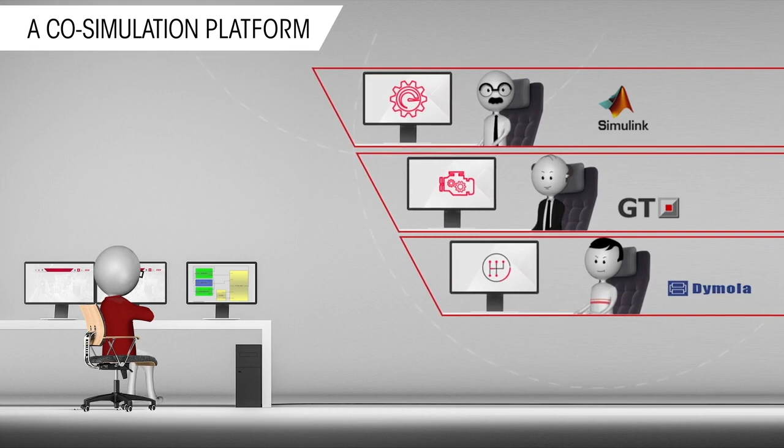Today, Jim is sad. Jim is a bright engineer at FEV. He's in charge of building the new powertrain for new vehicles, meeting the new RDE legislation and a multitude of new worldwide pollutant emission regulations. And nothing works. He has one team to define the ECU control laws, one for adapting the engine and its after-treatment system, one for the gearbox, and of course all these need to work correctly with different types of vehicles. All the design teams come with their models made from different software tools and are absolutely unable to communicate.

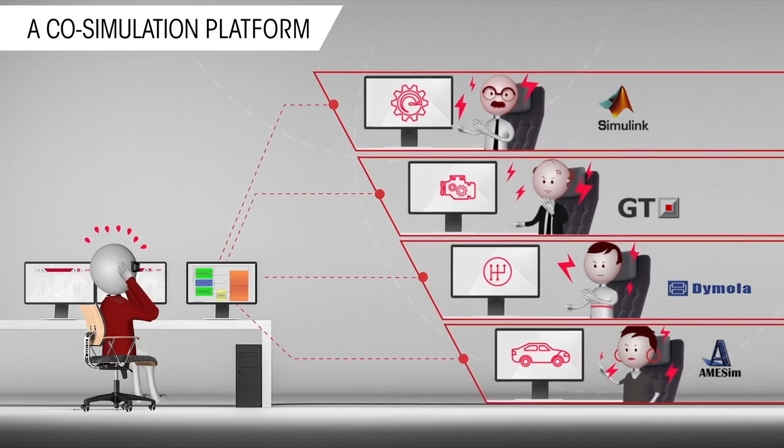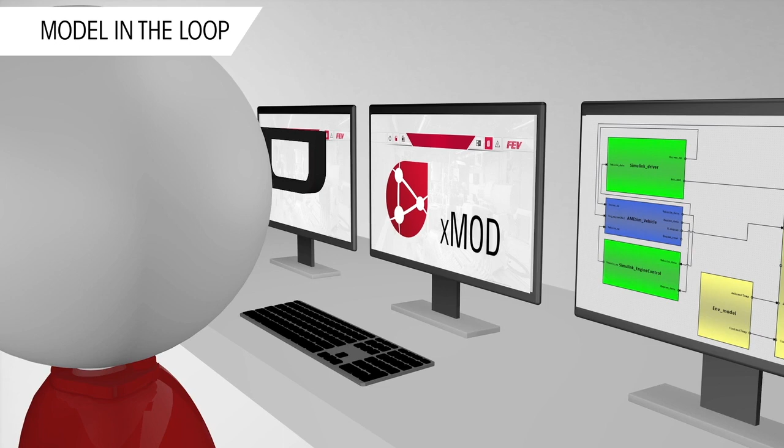Fortunately, at FEV, they have xMOD. xMOD is a co-simulation and virtual experimentation platform. Combine your models and create the complete powertrain system using native co-simulation features and standards such as functional mock-up interface. Thanks to the power of calculation of xMOD, there is almost no limit. Now the design teams are happy, and Jim too.

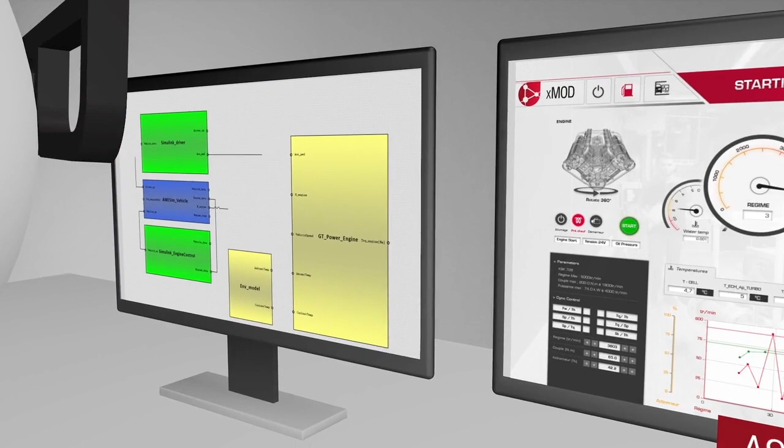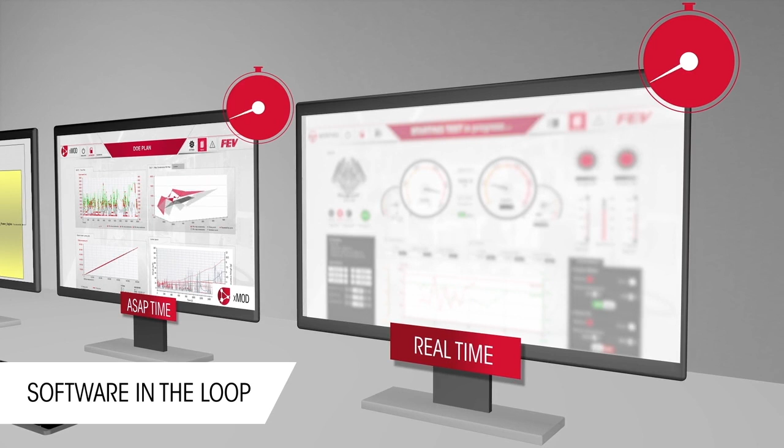The models-in-the-loop operation is done. He can go to the next software-in-the-loop step by integrating the models in standalone and check if the design operation has been done well. In a minimum time, he will be able to assess an incredible number of scenarios, due to xMOD's exceptional speed-up, 10 to 40 times faster than others, and much faster than real time.

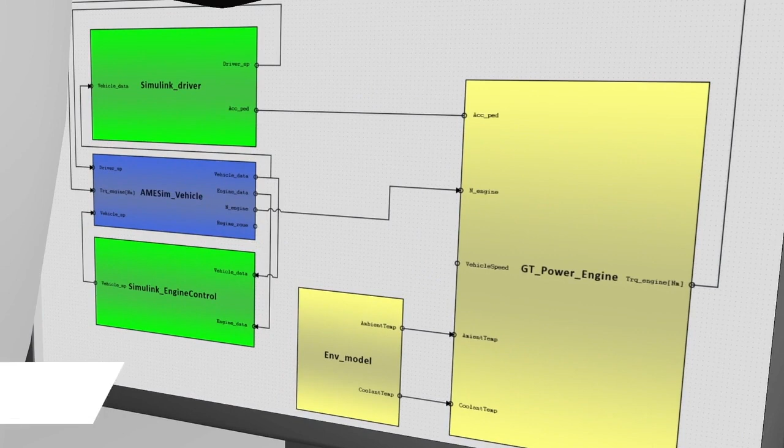Hey guys, it seems that there is a problem somewhere in our simulation. What to do? Let's go back to my models, the so-called MIL step, and just modify my models accordingly. Replace my engine model. Wait a minute or two. And now it works, just like that.

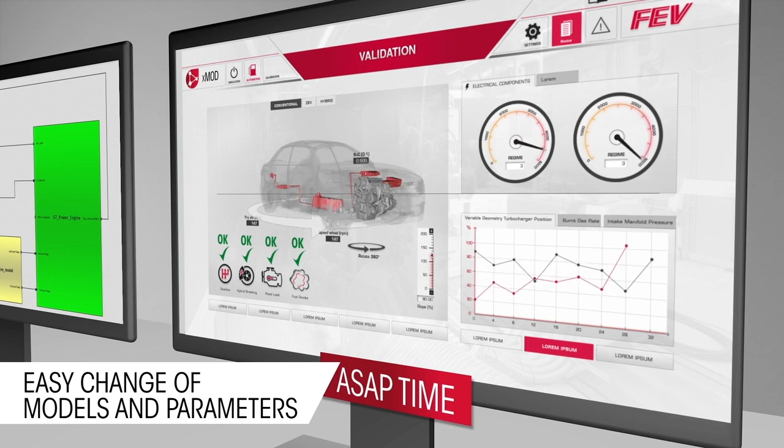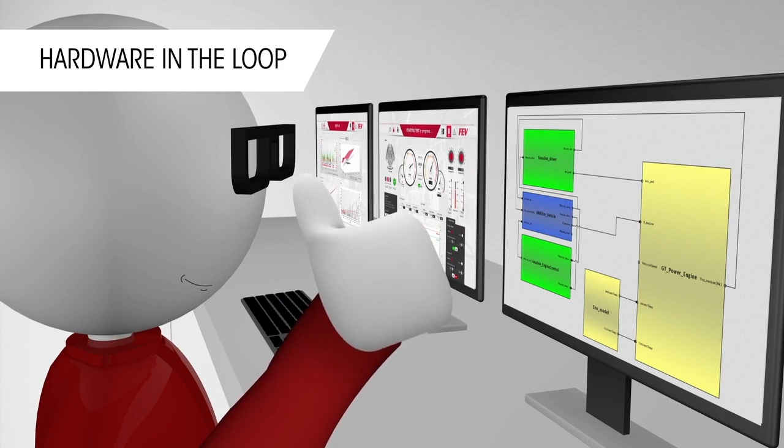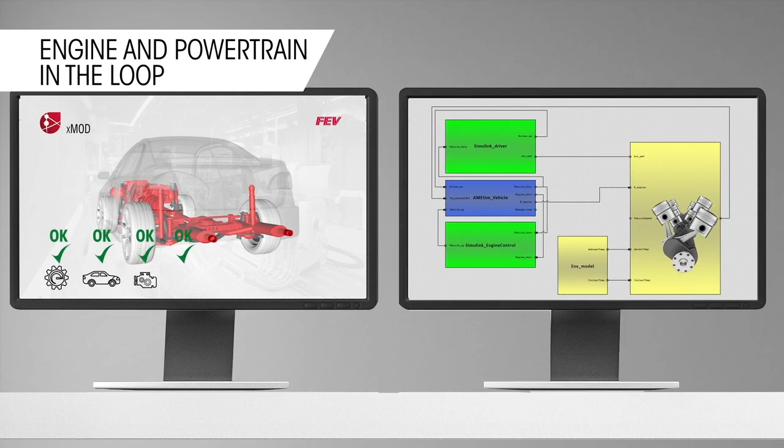Now Jim is eager to check if his design proposition will work in the real world. First step, test the ECU in the FEV HIL testbed in real time, and then check at the powertrain test bed. Imagine the time that Jim has saved. Without xMOD and simulation, it would be very difficult now to develop new powertrains, including hybrid and electric ones. What makes xMOD different is its heterogeneity and its hard real-time capabilities. Thanks to that, the models keep the same level of accuracy along the process.

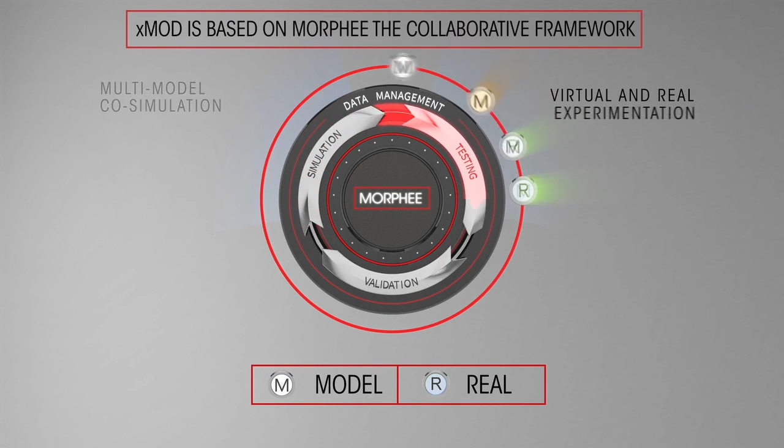Consider all the functionalities and tasks you can do with xMOD. Imagine the gain of time for everybody at each step, from the design office to the control team, and then to the testing and calibration department. You can stay in the same environment, same models, screens, procedures, test cycles. Now Jim feels relaxed. His team is happy. His customer will be happy, and maybe will buy an xMOD for his own.

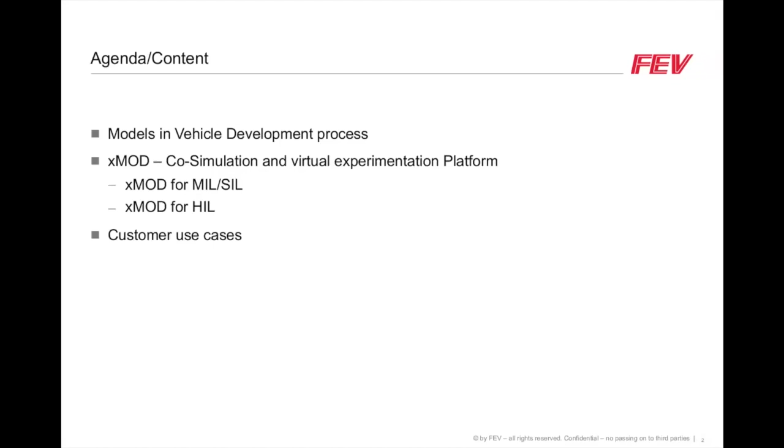I will finish by presenting some customer use cases that show a panel of cases that can be applied using the xMOD software. So let's start with this first slide, explaining the current process.

I think you all know how this process is organized, mainly in three big steps. We start from requirements until producing the final product. From the requirement, we start mainly by doing modeling and simulation. We have different departments working on different parts of the vehicle, each using the best-in-class software on the market, with many highly skilled engineers using their best software. So they have different types of formats.

This is the first step, which is virtual integration. They will try to do some co-simulation, some integration of the systems together to understand the system. As systems become more and more complex, especially the vehicle, especially with hybrid technology and ADAS technology, it becomes more and more important to study the system early, to do full integration early. So this is the first step.

The second step is more related to the mixed integration between the virtual world and the real world. Here I am talking more about real application, in which we have models running in real time and connected to hardware systems to do some validation, for example rapid prototyping or function testing, etc.

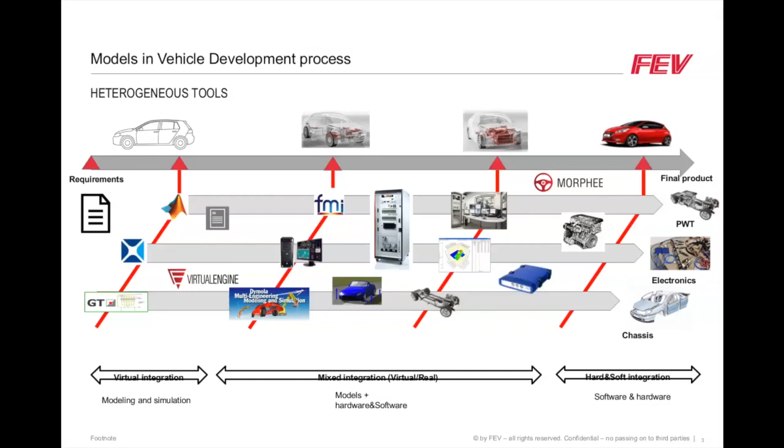So what happens if during this process, at an advanced level of testing your component, you notice that you have a problem at this level? You are too advanced in the process, too close to the final product, and here you discover, unfortunately, that you have a problem, let's say in your control strategy to control your hybrid strategy.

So you have to roll back the whole process, go to the first step, open your Simulink model—maybe, since it's a control model, it could be Simulink or other C code—and use this model, redefine it, change it, and then you have to again unfold the entire process from the beginning with all the risks. We noticed in our internal projects that there is a lot of risk and waste of time. This process works, but it is not smooth. It's a discrete process due to the heterogeneity of the software and hardware, etc.

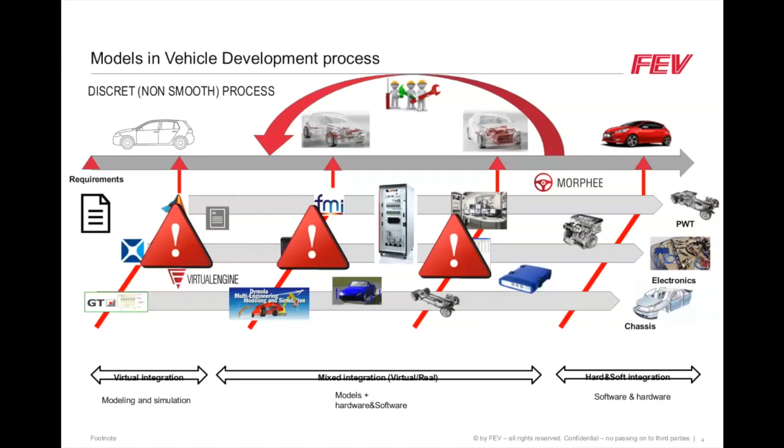So what we propose at FEV is to have a common, unique platform for model execution from the beginning, very early, from model in the loop, software in the loop, until hardware in the loop, until the test bench. What we propose is that you start designing your models, let's say for control using MATLAB Simulink, for your vehicle using AMESim software, for your engine using GT Power, etc.

Early on, you can start using one platform at this time to integrate your models, to do tool coupling, full integration, software in the loop, validate your models early, and then with the capacity to execute the models in real time, hard real time, you can go through this process step by step.

If you discover at a moment that you have a problem, when you roll back the process, open your control model and change the strategy, you can test it in the same platform immediately. Before unfolding the whole process, you can know early whether the last change you made is efficient or not, and this saves a lot of time. This has been proven during many projects that we have made.

So this is the vehicle development process, and this is our solution for a smooth transition to work on this process and bring your models until the test bed, if you want.

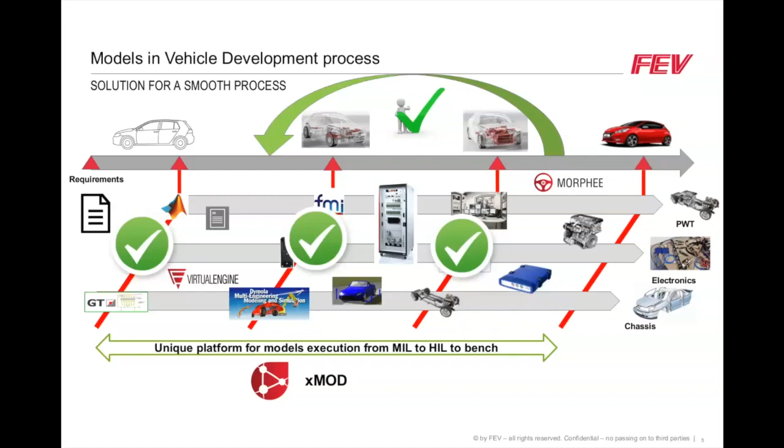So here there is a resume about this multi-model integration and virtual experimentation platform. xMOD, as I said, covers many steps, starting from model in the loop until software in the loop and hardware in the loop. The first big feature for xMOD is the possibility to make the models work together. You can use the best in class of your software to model your parts of the vehicle, built by different people, using different languages, and all these models can be integrated in one platform with different technologies that I will explain in the coming slides.

Also, xMOD is a virtual experimentation laboratory. It means that once you import your first model, you can immediately play it, plot it, add some instruments, and check it.

The third advantage of xMOD is a very important feature: its core technology is its extreme performance. In xMOD we have highly optimized algorithms for advanced synchronization using multi-threading, multi-core, multi-solvers, etc.

There is a slide to explain this, and my colleague Morgan will also talk a little bit about that. Finally, xMOD ensures continuity from model in the loop until hardware in the loop. You are using the same software, same platform, same technology, same license, and you can go from your models coming from the modeling guys, the simulation guys, until the test operators and the test bench. So you can use it during the whole process.

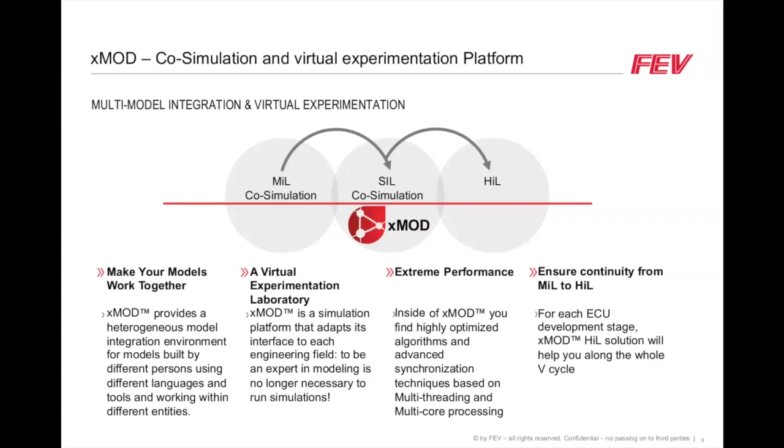So this is an overview with some pictures that can resume what I said quickly. We have two, let's say, worlds. The first is the virtual world: model in the loop, software in the loop. We start embedding, integrating, and importing physical and control models, trying to combine everything together. Here xMOD is defined as a standalone and tool-coupling co-simulation platform. By standalone I mean something, by tool coupling also I mean something, and I will explain that. xMOD can do both at the same time.

The second world is real time. When I am talking about real time here, it's hard real time, deterministic real time based on a real-time operating system, and xMOD can be used as a real-time simulation platform. In this slide you can see we are using a laptop on the left, and on the right we are using a desktop PC equipped with a real-time operating system. But the same application and the same models are used from the beginning until the end.

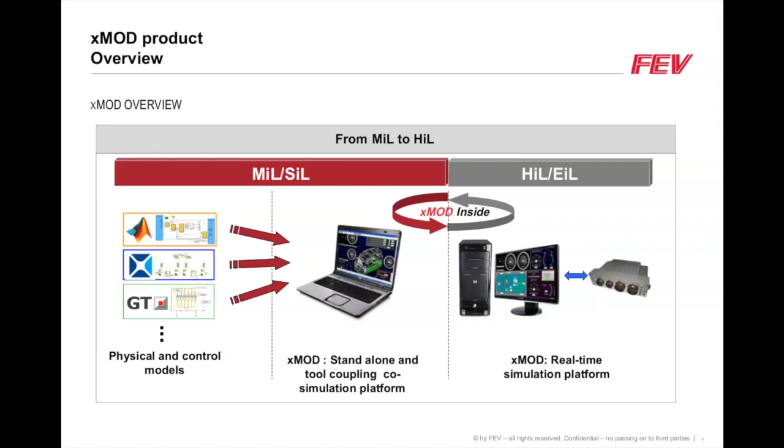Now I will explain how we import the models inside xMOD. To get some models running in xMOD, there are three possibilities, three ways to do it. The first one, the basic one that we selected since the beginning of xMOD ten years ago, is to use what we call the MathWorks standard. This means that the target we provide to generate models for xMOD is based on the Simulink Coder toolbox, formerly known as Real-Time Workshop.

So if you have your model, let's say this time I'll talk about Dymola from Dassault Systèmes, you can export your model from Dymola as an S-function to MATLAB Simulink. Once you have your S-function running in MATLAB Simulink, you can use the xMOD target, select it, and generate a model for xMOD through a compilation process. This model will contain two files: one XML file with the extension .xmodel, and one DLL file. The XML file describes the inputs, outputs, parameters, signals, and many other features related to the model, and the DLL is a binary file representing the behavior of the model.

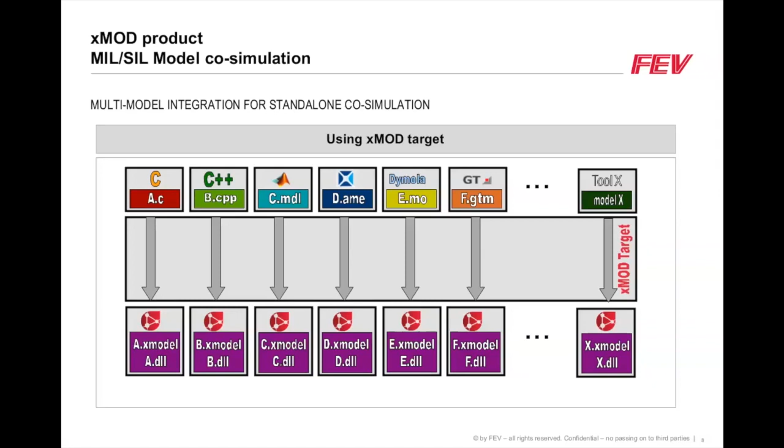So the second method for that is using the FMI standard. In 2010, xMOD was one of the first tools adopting the standard and participating in applying prototypes for the FMI, and is still continuing to do that. So xMOD is supporting FMI for model integration, FMI 1.0 and FMI 2.0, and xMOD is also supporting both types of the FMI: FMI for model exchange and FMI for co-simulation.

So the concept for the final users of the FMI is very simple. You can export an FMU, which can have one of these specification types or both together. So what is FMI for model exchange? It means that the model that you will generate from a modeling software will be called FMU, Functional Mockup Unit. This model will not contain a solver to solve the equations inside the model. So in that case, when you drag and drop such a model, xMOD can detect it and will propose some solvers to be used inside xMOD to execute this FMU. So we propose some fixed step solvers and also some variable step solvers.

For the FMI for co-simulation, when you generate an FMU from another tool with this type of specification, it means the solver will be embedded already inside the FMU. And when you drag and drop this FMU inside xMOD, xMOD can detect it and will execute this model without the need to use an internal solver inside xMOD.

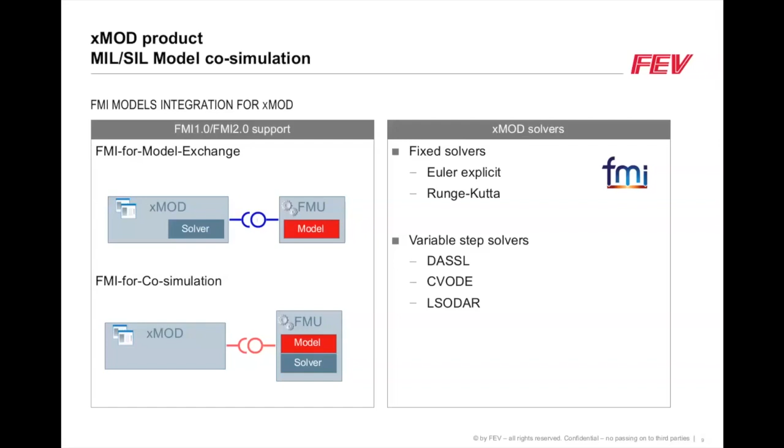There is also a third possibility to get some models running inside xMOD. The third possibility is based on what we call tool coupling co-simulation, because co-simulation can be divided in two types of simulation. The first one is what we call standalone co-simulation. It means the models are generated as files and are executed inside the integration platform. And sometimes to execute this type of models, you don't require to have the original tool installed in the same computer. We call this standalone co-simulation. So it is the first method of integration of xMOD, and some types of FMUs generated can also be executed without requiring the original tool.

So another co-simulation method is called the tool coupling co-simulation method. For tool coupling, it means the model that you will use will be executed in the original software. If we take, for example, a Simulink model, this Simulink model will be executed inside Simulink, and the other models will be executed inside xMOD. And xMOD and Simulink will communicate together, will advance their time during the simulation together, and will synchronize themselves. And here I am giving some examples in which xMOD can be connected with other software like FlowMaster, Simulink, AMESim, or GT. Here, xMOD is defined as a co-simulation bus.

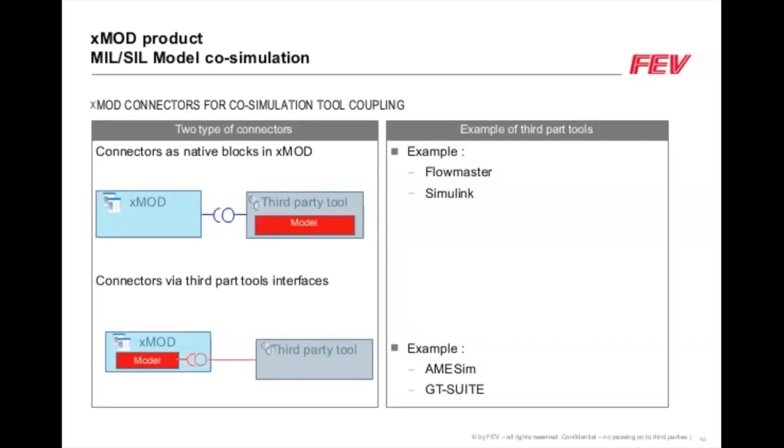Okay. So first of all, I have a Simulink model, and in this example, I will compile a Simulink model that embeds the GT Power real-time S-function. You can see it here. Before trying to compile the model, I need to configure a compiler. There is a MATLAB command to do it. I already have the compiler set, and after that I can compile the model. And there are some rules that you need to respect, some Simulink Coder rules. So I need to check that my model has a fixed step solver. Okay. This is the only rule that I need to check before compiling.

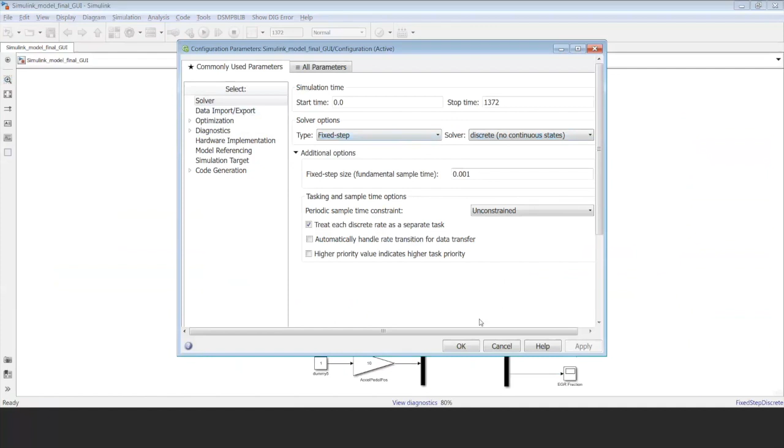Here I will execute the model to check if it is running correctly. You can see that yes, it is running. I can check my result first. So maybe we will check the air mass flow rate. It seems good. So okay, now I can prepare the model to be able to compile.

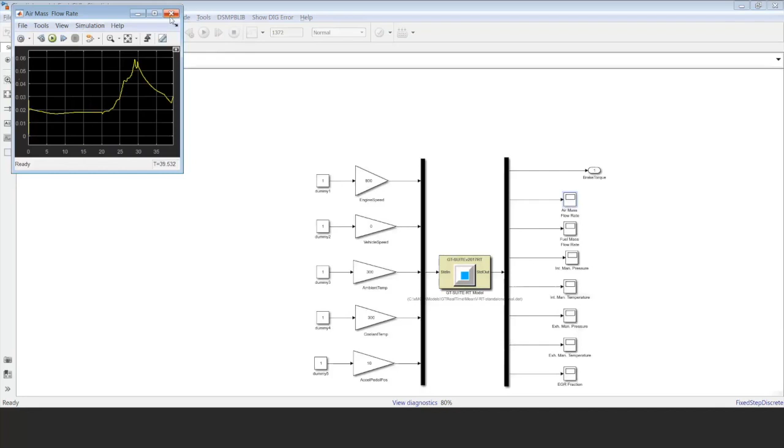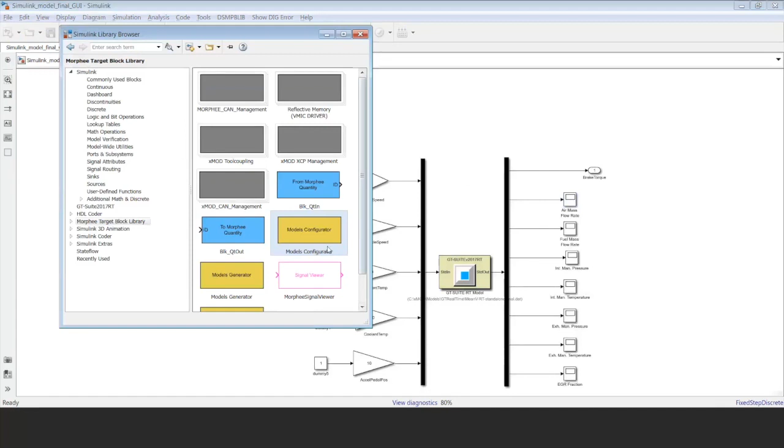As there is a GT Power real-time S-function, I need to configure some things, but it is very easy. I will go inside my Simulink library browser. We have a block named Models Configurator. I will drag and drop it inside my Simulink model. Double click. It opens a GUI that I can configure, and I can see that I have a special option

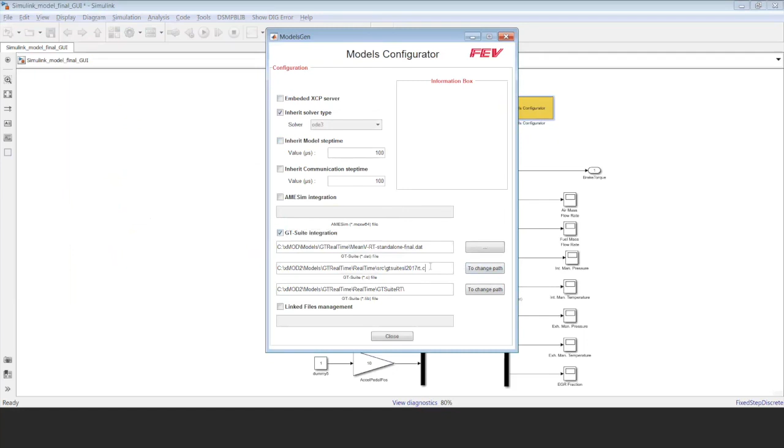to integrate GT Power. I just check the option, and I can see it detects the file used to be able to execute the GT Power model, and it also detects all the files that are required to be able to compile the model. I close it, and I will just run the compilation process. I have the button here, I just click, and it starts the process.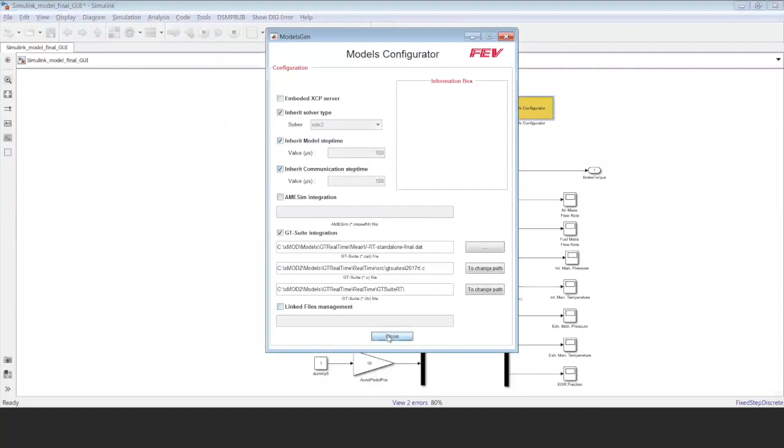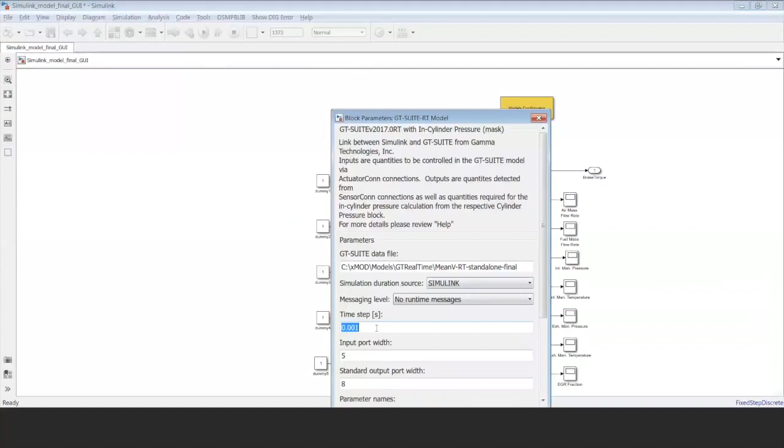To follow what happens, I have diagnostics made by MathWorks. If I click, I can see all the lines that are written during the process. Okay? Oh, I think I have a problem. I will configure it correctly. What's happened? Sorry for this problem. I will check. Here I have this value, and I build.

Okay. If the process is completely finished, I can see the 5 last lines that say we succeeded in completing all the procedure to build the model. If I check inside the MathWorks folder, I can see that there are some files generated by the compilation. I have the xModel that Hassen already described. It is all the signals and parameters and input-output of the models. And I also have the DLL generated.

Okay. Now what I will show you, I will integrate this model inside xMOD. So I will start xMOD and share it. Okay. So I need to create a simulation. So I will go inside the simulation tab and I will create a new test simulation. It opens a complete simulation, but for the moment it is completely empty. I have an edition area where I can add some models.

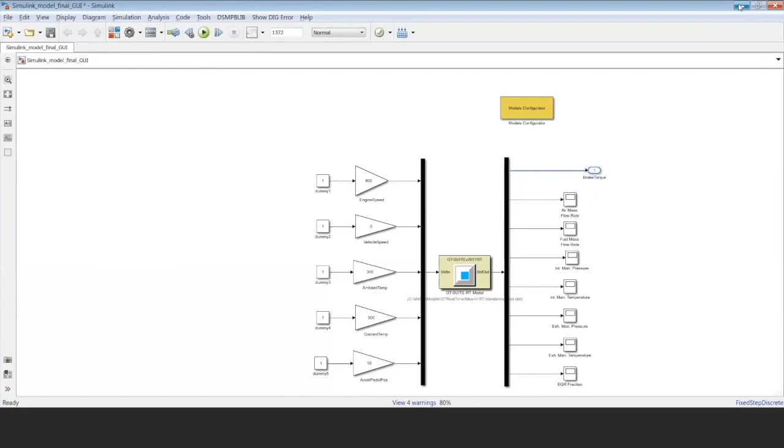If I want to have more details about this model, I can just double click. It will display a tree. I can see all the outputs, all the parameters available inside the model. It is all the gains, for example, here. And I have access to some signals also. Okay? If I want to be able to see the value, to control the value, etc., I just need to check a checkbox to create a quantity. It will give access to the memory of the model. I can name the quantity how I want.

Okay, so it is how to add what we call a native xModel from xMOD, coming from the Simulink Coder and the xMOD target. Now, inside this simulation, if I want, I can also add an FMU. I go back inside my library of models. I see some FMUs. I just take the FMU and I drag and drop inside the MIPS.

I can see that for this FMU, there are two possibilities, FMU for model exchange or FMU for co-simulation. I can select model exchange. It will ask me for a solver. I can select the communication step, and if I want to activate some logging. I have the FMU extracted. I can see all the outputs, inputs. You have the model tree also to see parameters and signals.

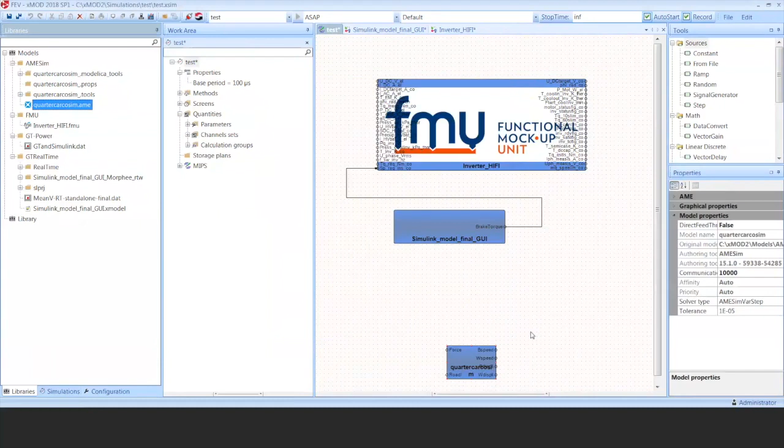Okay, I have a special GUI to define all the options inside the AMESim models. I can select if I want to use the variable step solver or fixed step solver, and I will use the unfold option to see all the input-output as scalar. It detects all the names inside the AMESim models. I can change it if I want. And at the end, I have a block exactly like the other, and I can connect if I want by exactly doing the same workflow.

So here you have an example where we mix the three cases: Simulink model compiled, FMU, and tool coupling co-simulation. Now, what I want to show you is how to import a simulation inside xMOD. So Hassen already prepared a simulation and he sent it to me. I will just import a simulation. I click on the button to import. I select a zip that we prepared from his version of xMOD, and okay, I import it. It finished importing, and now I have the simulation already prepared.

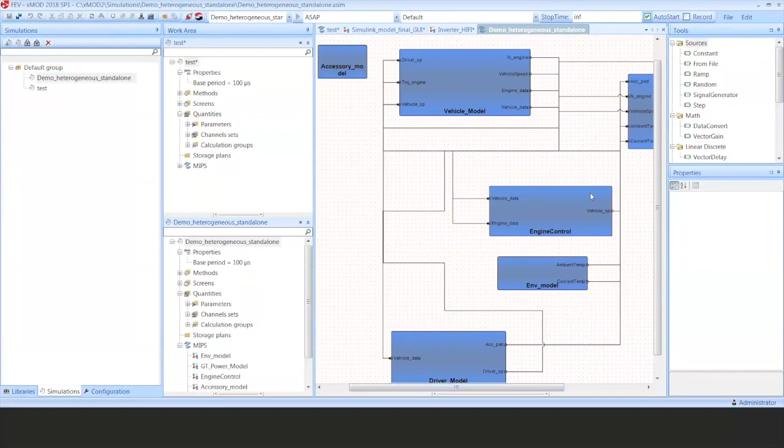If I open it, I can see it is a complete simulation with a lot of different models, mixing GT-Power compiled model like I have done previously, Simulink model for control or for drivers, and a vehicle model coming from AMESim models. And I can directly, if I want, execute it.

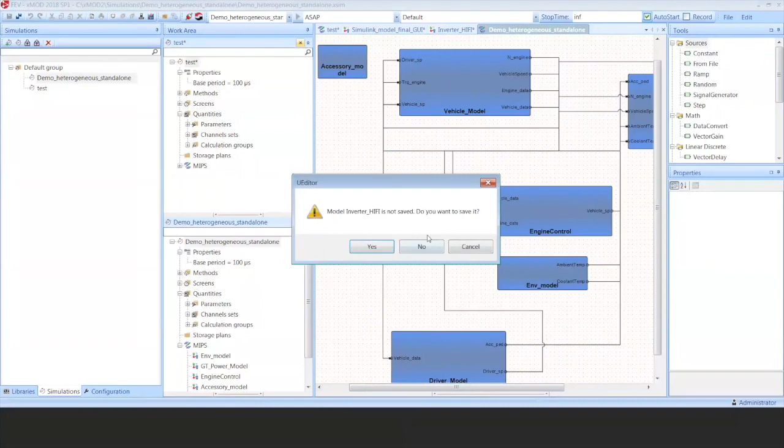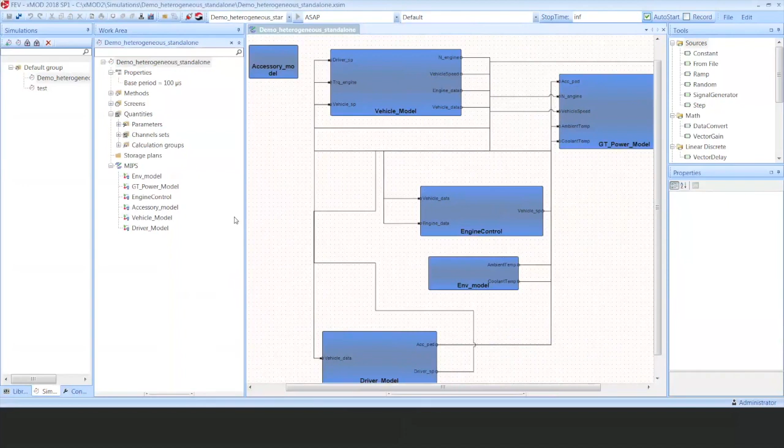Will not save the previous one. Okay. Oh. I don't know why I'm not able to play. Strange. I have a problem on my PC. Maybe Hassen will play the demo on this PC. I don't know why, but I'm not able to. No problem. Give me your hand. Yeah, I will give you the hand back, Hassen. Okay. Thank you, Morgan.

Okay, so this is my screen, and now I am sharing the editor, the same application that Morgan was showing. So here there are some models combined together: vehicle model from AMESim, GT-Power model from GT, it's an engine model, mean value engine model, and some control and environmental model and driver model from Simulink. So let's run the simulation.

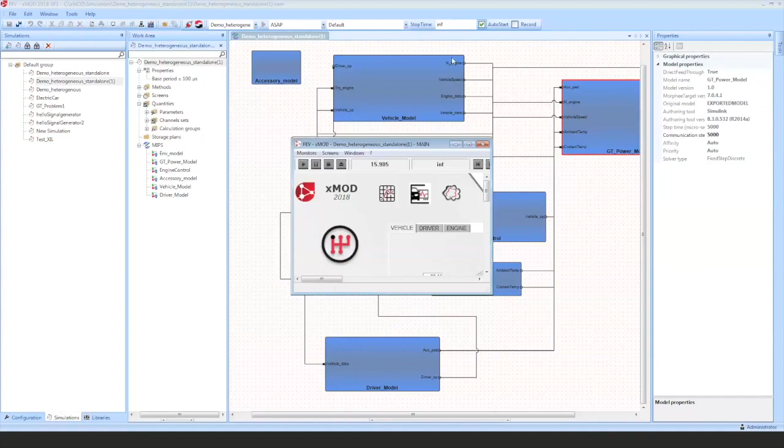And I have to share this. Okay, share, how to share. Okay. So Morgan, can you confirm that you can see the simulation running? Yes. Yes, okay.

So here you can see this application that I designed for this webinar. So, as Morgan explained, you can use your instruments. You can drag and drop your parameters, signals, inputs, outputs to animate and to interact with the models. You can have different views. For example, here on the vehicle, you can have a view on the driver or on the engine itself.

So what we can see here, we have a speed set point coming from the control model, and we have here the vehicle speed that we measure, and you can see that the vehicle speed we measure is following exactly the control. It means that our control strategy is running fine. So here you can see in the bottom, for example, we have many cycles. These cycles are, for the moment, implemented inside the models. So you can switch from one cycle to another one.

You can interact with the buttons. So these buttons are developed by the xMOD engineer who has done this application, who integrated the models, etc. So it can be scalable, different from one application to another. It is not fixed. It is not developed by a software engineer. It's developed by a simulation engineer.

So I can stop, and I can here, for example, select FTP and start. So it will run another cycle based on FTP. You can see also some values, and you can interact completely with some parameters of the simulation to change them, for example. So that's all for the demo, and I propose to go back to the presentation.

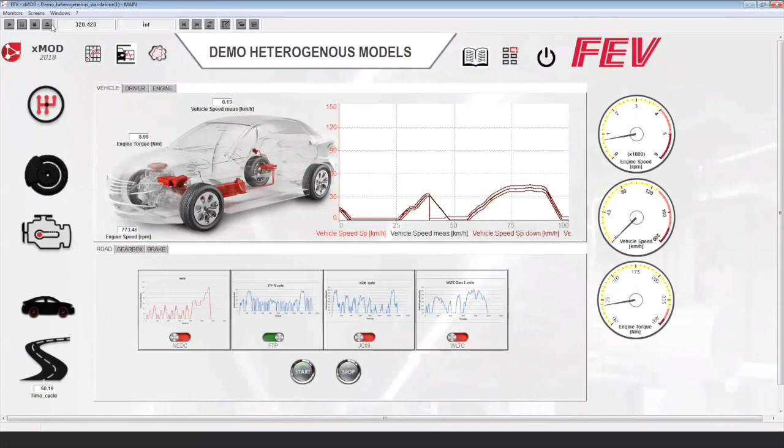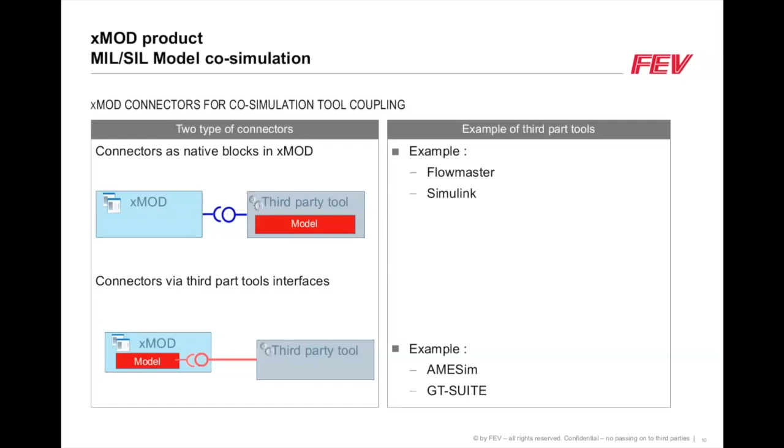Okay, so the next slide is about the compatibility table. So this is a non-exhaustive list, of course, of some modeling and simulation software available on the market. I have to remind that xMOD has had a neutral position since the beginning, since 10 years ago. And here we are showing the compatibility with these tools based on 3 axes of comparison. So the first one is standalone co-simulation. It means using the xMOD target, using the MathWorks standard, and compiling the model, getting the DLL and the XML file, etc. So for that, you can see we are mainly compatible with many tools.

The second axis of integration is the FMI integration. So here we are showing only part of these tools, but if you go to the website of the FMI standard, you'll see that there are a lot of softwares coming each year and supporting the FMI. So we cannot list all of them.

The third axis is about this tool coupling co-simulation, which is a nice feature, but we are only doing this for Simulink, AMESim, GT Power. So this feature sometimes can be requested by some of our customers, especially for control departments when they are designing the control model. So the engineer would like to keep working on his environment.

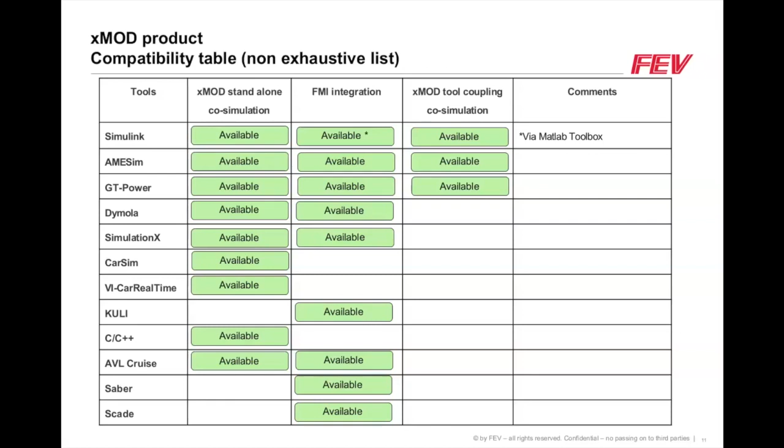Most of the time it's Simulink, and when he clicks on play on Simulink, it will run xMOD immediately. So the rest of the vehicle is connected to the control inside Simulink, and he can debug inside Simulink. He can change a lot of things, and once the model is fixed and is giving good results, he can compile the model one time to get a standalone version. So it is also another possibility, and as I said, it is possible to mix the 3 types of models inside

xMOD. So for the edition part, I think Morgan showed you also some features. So it is like in Simulink, you can drag and drop your models, you can connect them automatically, or you can connect them manually. To connect them automatically means that there are some rules that you have to follow during the generation of the models. You can design your simulation, you can export your simulation to another engineer, you can import it, and all this is based only on one click.

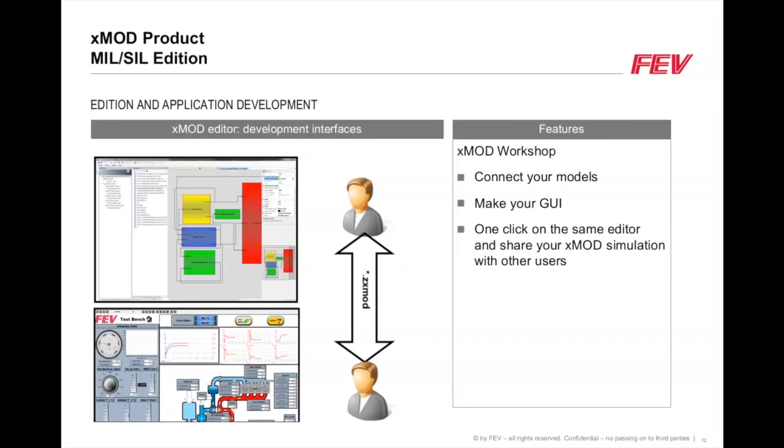For the execution part, as I said at the beginning, this is the main core technology of xMOD. It's all in one tool to develop the application. So in xMOD, each model is represented by a thread, okay? And each model also is represented by a solver. This solver could be a fixed step solver, a variable step solver. It doesn't matter for xMOD.

So it's multi-solvers, and if the models are using different step times, different solvers, different threads, they are fully also multi-core. So when we say xMOD is multi-core inside the model, each model can be executed in one core on your computer. So if you have a 6 core computer and you have 6 models, you can balance each model in one core. This is possible, and for that I am writing here load balancing.

So it is also possible to give xMOD the possibility to handle the execution of your models, so it can balance one model from one core to another one to speed up the execution. When xMOD detects that the CPU time is not enough for your model, it can balance it to another core. So this is really unique, and it's really performant inside xMOD.

Also, you can save online your calibration for reuse. It means that you are working on your simulation, you are changing the parameters, etc., and you can save this calibration. You can export it, you can load it again if you run your simulation one time again. Of course, in xMOD you can develop your methods, and you can develop many scripts, and everything is drag and drop. You don't have to code anything manually.

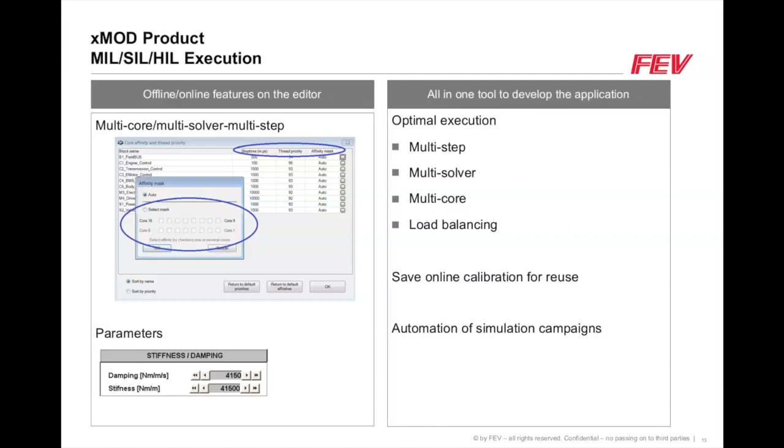So this is an example of an engine model developed inside the AMESim software, and this model was not able to be executed in real time at our customer. So what we proposed is to split this model in 5 subsystems. Each cylinder was represented by a submodel, and the air path also was split into one model. This complex model at the beginning required one fixed step solver at 25 microseconds to give accurate results.

So using this possibility to split the models, we helped our customer to split the model, to make it run inside AMESim first, to export everything to Simulink, to make the 5 sub-models inside Simulink run with the fixed step solver. For the air path, we didn't use 25 microseconds. It makes no sense. We used 150 milliseconds. So we relaxed the execution of the air path, and this is the benefit of using different solvers, different step times. And xMOD can handle that.

And you can see here in the middle the MIPS inside xMOD, which means the big model inside xMOD, and you can see that you have the 4 cylinders and the air path connected all together automatically. And during the execution, it is multi-core, multi-threaded, and it was 25 times faster to gain real time.

And it was possible to use this model inside xMOD in hard real time without reducing the model, without using maps, for example. And you can check in Google to find a video on YouTube, for example. And you have a live demo of this model connected to a MicroAutoBox.

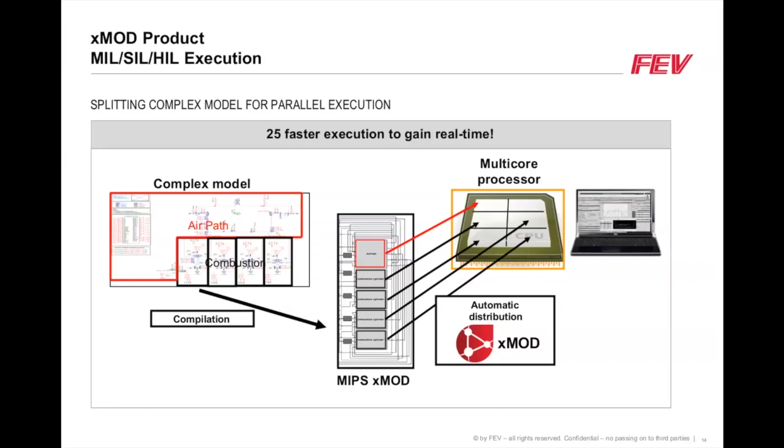So now I will move to the final part, which is the xMOD hardware in the loop. So for each development stage, xMOD can be used. So we move now from the co-simulation on laptop and Windows to co-simulation in real time. Hard real time. We have a real-time operating system controlling all the execution of everything inside xMOD: the models, the methods, the instruments, etc. And you can do for that some rapid prototyping, functional testing, validation, etc.

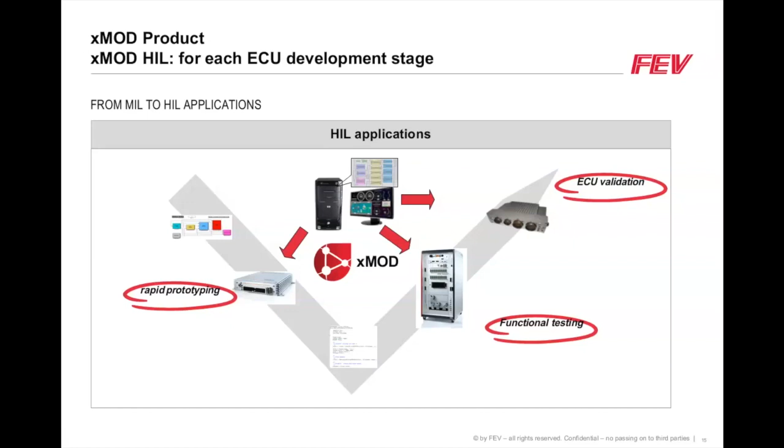So the first use case coming from one of our customers is to validate this MicroAutoBox. A MicroAutoBox is an open ECU. Maybe some of you don't know that. It's an open ECU that can be used at the test bench, on the car, or in the office. Inside it, there is a control of the engine model, and our customer was using this at the test bed to validate the strategy for the control of the engine.

So we helped him to develop a full powertrain model plus energy management. The models were very complex. You can see here all the models, the big model inside, and we embedded everything in a standard PC. We equipped this standard PC with a real-time operating system, RTX. So RTX is just a level on top of Windows. So Windows will run in one core, and Windows cannot crash your computer or interrupt the execution of the real-time operating system.

And the real-time operating system will take the rest of the cores to execute the models, then to execute other operations. And using the CAN network, it was able to connect simply this MicroAutoBox to the xMOD standard PC, and establish a CAN communication to validate this engine control using a virtual simulation. So it was made in the office. For our customer, before going to the test bed, it was an early validation made in the office using a MicroAutoBox with a desktop PC. It is not at all an industrial PC or specific hardware. It's just a standard PC.

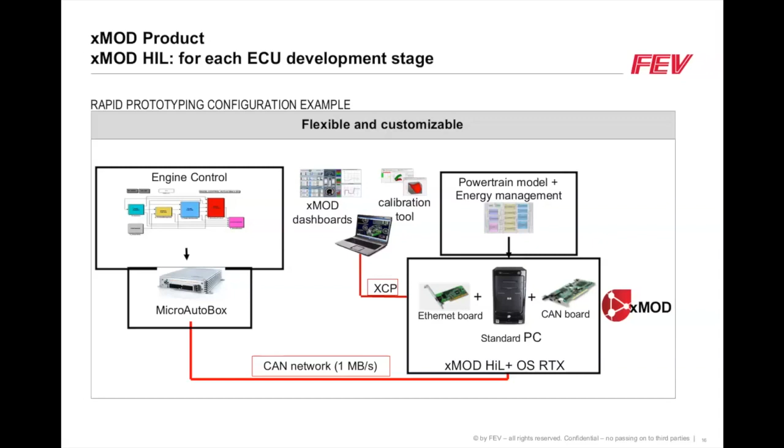Of course, you can do, for example, some calibration. You can connect external tools like INCA to interact with the simulation of xMOD. If you don't like, for example, to use the dashboard inside xMOD, you can use some external software. A second application is for function testing.

And this is one of the main applications used by xMOD. Some of the HIL platforms available on the market are not able to execute some types of models in real time. So xMOD is here seen as a compute unit that can execute the models in real time without reducing them, and we propose to connect this xMOD platform to these HIL platforms using, for example, Ethernet here, or EtherCAT, or shared memory, fiber optics, etc. So there is a panel of protocols that can be used with xMOD.

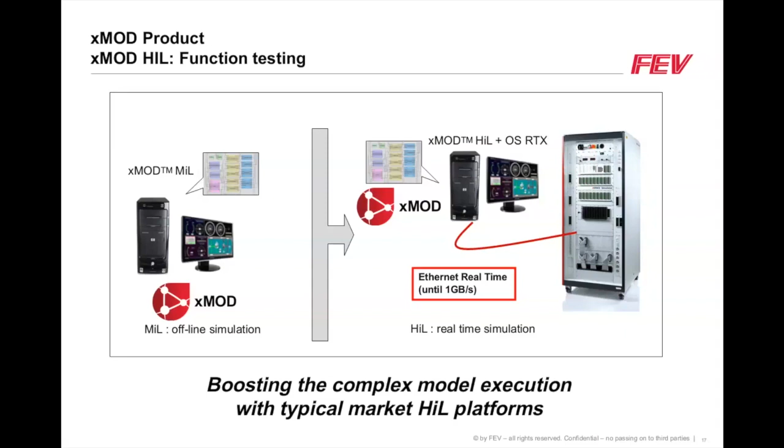Another case is what we call engine in the loop. This is also a big success for xMOD. So what you can see here is a complete test bed. Here the automation system is the Morphee automation system coming from FEV, but it can be any automation system, as I said, an in-house automation system or others in the market. So the automation system here, Morphee, is controlling all the engine, the ECU, the dyno, the battery, etc.

And in xMOD, all the rest of the vehicle was designed. So a battery model, hybrid ECU controller, a vehicle model, the roads, etc. And everything is executed under real-time constraints. And xMOD can be just connected to this automation system, to the test bed, to make the engine behave as it is in the vehicle.

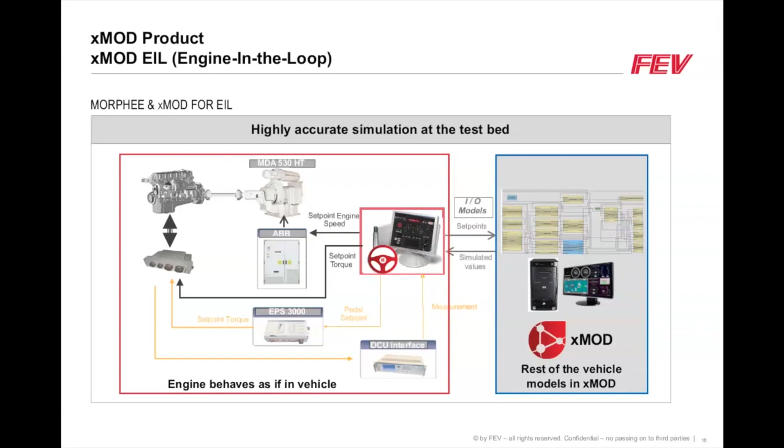So the same application is now transformed in the next slide, in which we will replace this real engine inside the automation system by a modeled engine. So here you can see that for this case, the Morphee automation system is also able to run complex models in real time. And here we are transforming completely the real engine to a virtual engine, not only by using physical models, in this case MATLAB and AMESim, but also using some DOE models and statistical models to have better accuracy close to the real engine.

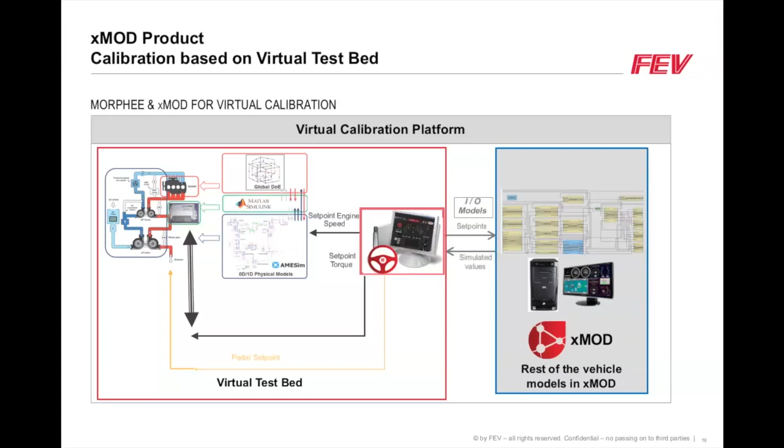So I will finish with the last slide before answering some questions. So here I am giving a future projection on xMOD. The target for xMOD is to be an open platform through standards, so we are working only on standards.

xMOD can be used as a runtime simulator for software in the loop and hardware in the loop. For software in the loop, you can see here the laptop. It means the execution is as fast as possible, under Windows, for simulation engineers, very simple. HIL runtime means that the models, it's a co-simulation, but the models are running on a desktop PC with

a real-time operating system, and there are some boards to establish hardware communication, etc. So on the top, you have standards. We are working on ASAM standards like XIL API, and also on standards like FMI. The goal is to give third party tools the possibility to access completely to the simulation inside xMOD, to start a simulation, pause it, play it, record it, restart it, etc. So xMOD will be fully controllable, and is already fully controllable from outside, from any external application. The only rule is that the external application should follow these standards.

So to finish, the final goal is, in 2020, to have xMOD as a plugin software within a toolchain supporting all the standards. So thank you all for your interest in this presentation.

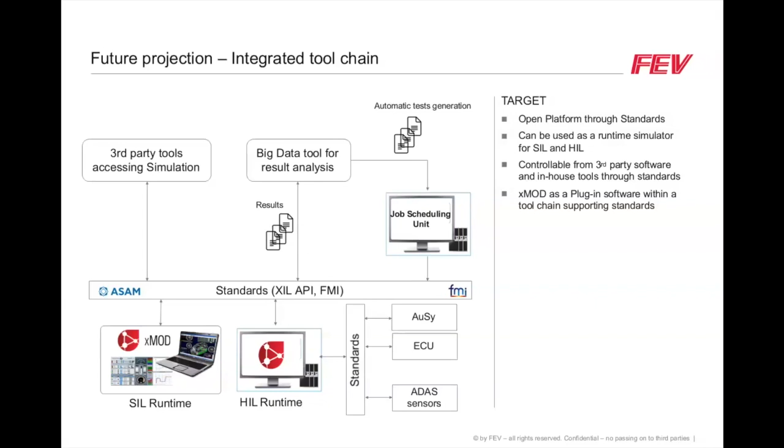An interesting question from somebody who wants to know, is the co-simulation approach physics-based or data-driven? It's a mix, I would say. Driven by data, yes, because we are exchanging data and signals between the models and doing some synchronization. But also there is some part of physics, because we have different solvers, and the solvers are handling state variables and handling events. So this is physics-based. So it's both, it's a mix inside xMOD.

Okay, and a follow-on question: how is multiphysics and multiscale modeling at macro, micro, and quantum level related to co-simulation for automotive product development? The question is not very clear to me, to be honest, and maybe if it's written out we can answer later, but it's not clear.

Okay, sure. Is co-simulation compliant with Industry 4.0 and manufacturing companies? I would say yes, it is compliant with Industry 4.0, and we can discuss more of this topic, it cannot just be answered like that.